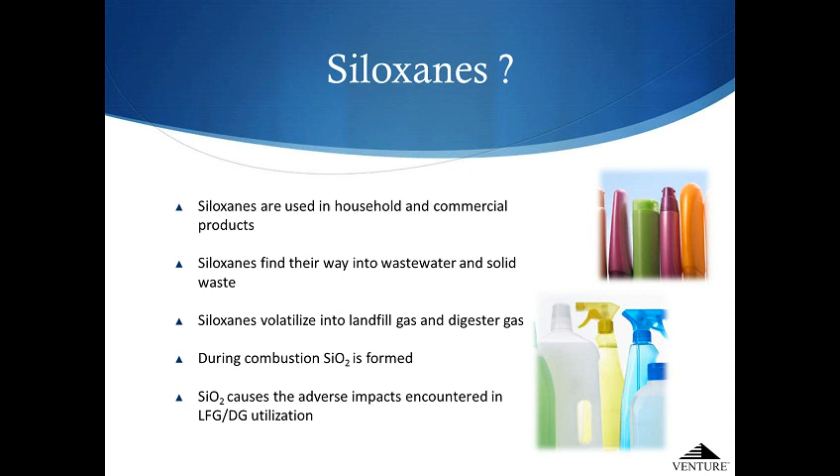We'll definitely get more into what happens inside your prime mover with siloxanes during combustion. The silica dioxide particles are, as many of you may know, very abrasive. As Kyle mentioned, you're taking the siloxane compound, which has a silica dioxide structure with an organic portion of the molecule. The organic portion burns in the combustion and goes away, but you're left with the silica dioxide backbone of the molecule, and those SiO2 particles are very abrasive, causing a lot of fouling of the surfaces as well as erosion on your moving parts in your engines and gas turbines.

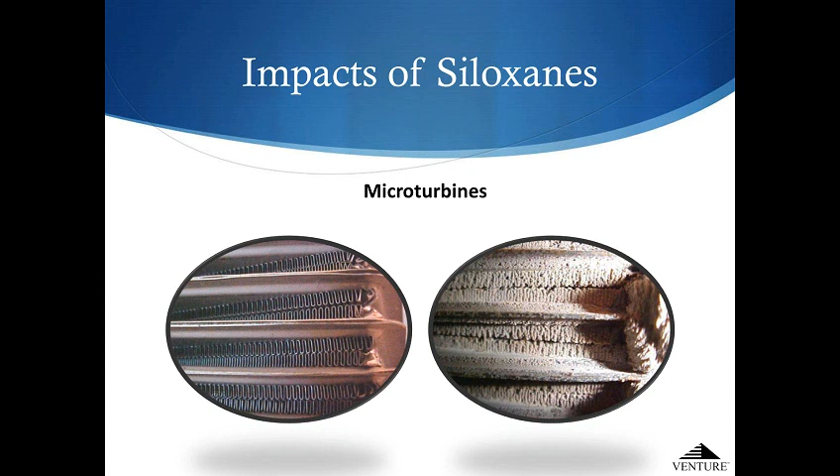And we have some really good pictures of that to show you. We'll show the impacts right here on microturbines. The fouling is obvious: clean microturbine on the left, fouled microturbine on the right.

In your boilers, I know that we've had more and more boiler projects recently. Reciprocating engines, which is, I'm sure, why most of you guys are on here. You can see the effects on the turbo on the left there, and then on the pistons on the right.

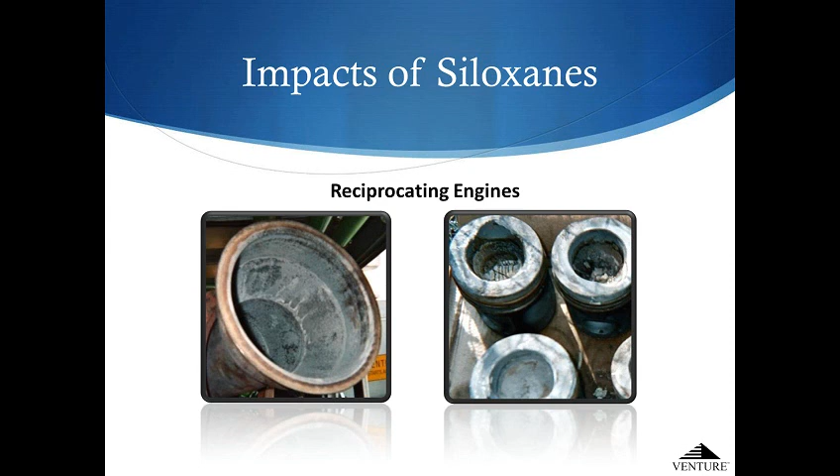Depends what state you're in, you're being asked or told to put post-combustion catalysts on your systems, and this is what can happen. Again, you're getting fouling in the media. You can see the honeycomb catalyst media photo on the left. All the grayish-white deposits are siloxane, silica dioxide residue, and it fouls the surface. From what we understand in our conversations with various vendors, there's no chemical attack of the catalyst, but it does coat the surface, and hence the catalyst cannot do its functional job because it's covered with silica dioxide particles.

So the objective is really to clean the gas so the post-combustion gas does not have any silica dioxide in it. Obviously, the catalyst vendors would love to see 0 parts per billion in the gas. That's not really practical, but there are limits. At least we know of one manufacturer where it has about 100 parts per billion target for silicon dioxide compounds in the gas, and that's really what we're striving to achieve or improve for siloxane removal.

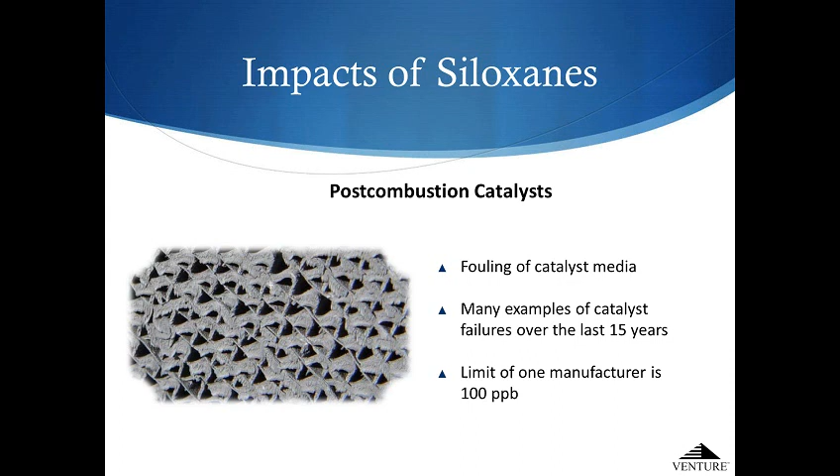So you can see the impacts that these siloxanes are having on your prime mover. You have a significant reduction in the efficiency of your engines or turbines. It makes your system unpredictable.

Certainly you're going to add to maintenance costs. You're going to change oils many more times per year. For top ends, many customers are out there manually cleaning the heads and pistons. Of course, you're increasing your likelihood of catastrophic failure as well.

So in addition to the deposits, the fouling, which creates corrosion, erosion of the rotary moving parts in your turbines and your reciprocating engines. The fouling from the deposits also has adverse effects on the heat transfer, so oftentimes engines and turbines will tend to run hotter when the deposits are inside the engines, which has damaging effects on the rotary equipment as well.

So there's a lot of reasons to really minimize the siloxanes, get those out of the gas.

Before we move on, there is a question that pertains to exactly where we're at right now. The question is from Patty: how can you identify the siloxane deposits from other corrosive matter on the equipment? How do you differentiate these materials?

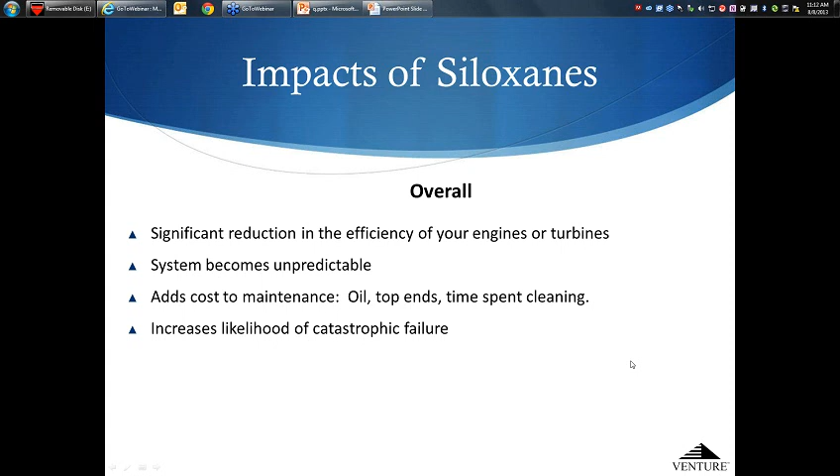Sulfur, switch gears here for a moment to sulfur removal, which is another problematic compound in your biogas. The sulfur is typically in the form of hydrogen sulfide, H2S, but there also are some mercaptan and disulfide compounds in your gas that oftentimes you want to remove.

The sulfur, in particular hydrogen sulfide, comes from gypsum, construction and demolition wastes that are found in the waste landfill gas, and then as it deposits or decomposes, you form hydrogen sulfide gas.

Now, the effects of the hydrogen sulfide are to corrode metal piping and equipment. Sulfur-bearing compounds, both the hydrogen sulfide as well as mercaptans and disulfides, all have distinctive odors they release. I'm sure many of you are familiar with the rotten egg smell from hydrogen sulfide.

Also, we're seeing a lot of regulatory limits being set on the amount of SO2 that can be released from facilities, and certainly when you combust gas that has hydrogen sulfide in it, the H2S gets converted to sulfur dioxide and sulfur trioxide when they're combusted.

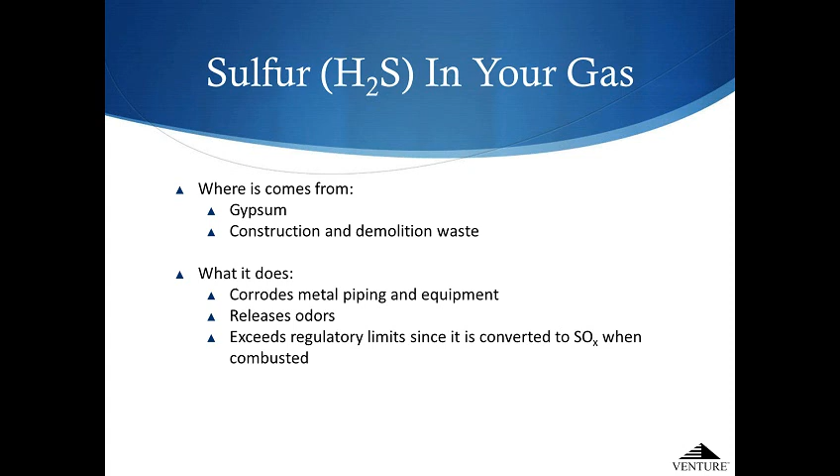And due to these regulatory limits, there's oftentimes a need to remove the H2S to meet these environmental regulatory limits for SO2.

So, several treating options are available. We'll just touch on four different broad categories. Venture has been involved with designing systems, supporting systems, and troubleshooting process problems on all four of these categories.

Upper left, you'll see it. Maybe some of you are very familiar with what we would call the solid adsorber, or scavenger systems. They're commercially available solid media where the gas flows through a fixed bed of this media, and then it chemically absorbs the H2S gas and holds it onto the media.

The commercially available ones include your Sulfatreat, FerroSorp, SulferRite. There's a number of carbon-based medias that are out there by various vendors that all will capture the H2S out of the gas.

These solid adsorbers are non-regenerable, and hence they're scavenger media, because once the media gets saturated or loaded up with the H2S, then it's a throwaway. The positive note for using a solid adsorber is there's no SO2 emissions.

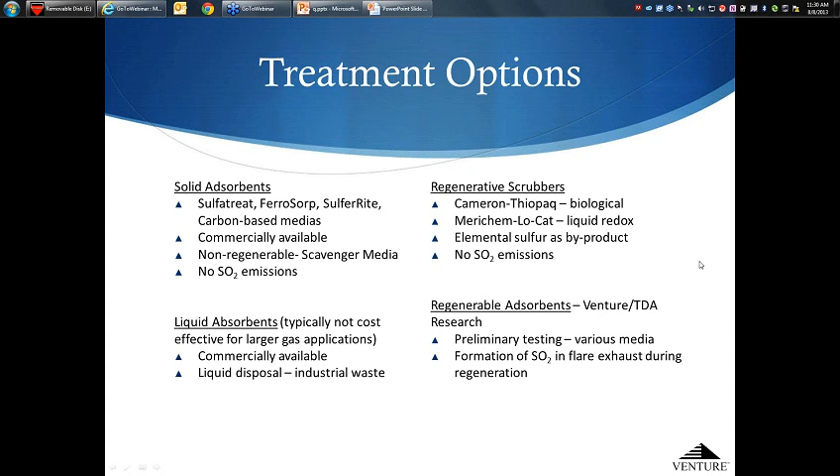Continuing on, we'll touch upon the siloxane adsorption system, a gas conditioning system to remove siloxane. It's predominantly targeted for siloxanes, but it does target other non-methane organic compounds, VOC organics, hydrogen sulfide to a lesser degree, and water moisture.

Our Venture system is a selective regeneratable adsorber system. Typically, depending on gas flows and concentrations, it will be either a 2 or 3 media mix system. Oftentimes we're using activated alumina, silica gels, and molecular sieve type medias -- a blend based on the concentrations and types of compounds we're looking to remove. Because it's a regenerative system, there's no carbon used, because carbon poses challenges to regenerate.

And this is a good time to answer the question posed by Justin. He asks, is saturated carbon considered hazardous waste, and can it be disposed of in a landfill? To begin answering, as you just learned, the Venture system does not use activated carbon.

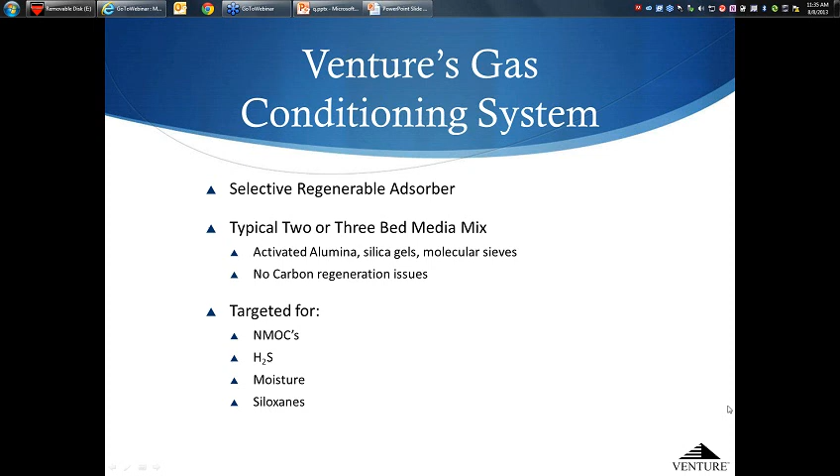I have seen several H2S scavenger type medias where they've failed for arsenic. But interestingly, on several landfills where they might fail one time, they'll test it the very next time they need to change the media, and the second time it will pass the test. So it really is, if you fail for arsenic or one of the other heavy metals, it doesn't mean that you're going to continually fail that test method every time.

Back up a second. There we go. So just to give you an overview of the process, the siloxane adsorption process that Venture has -- we're showing in this schematic two separate adsorber beds. We'll call them adsorber A and adsorber B.

You see the process gas will flow. There's a series of automated valves on the system. We're not showing the valves in this simplified schematic, but there are some pictures coming up in the next couple slides. The process gas would be treated through one vessel. For example, adsorber A is in production, flowing process gas through adsorber A, then through some post filters for particulate, and then the gas would flow to your gas turbine, boiler, or IC engine as treated gas.

While the process gas is flowing through adsorber A, adsorber B would be in a regeneration mode. We're showing that from the bottom up, where the regeneration gas would first go through a blower that pushes the gas into a heater, because we use heated air to regenerate. That hot air flows up through adsorber B. As it flows up through the vessel, it causes the siloxane compounds, organic compounds, water, hydrogen sulfide, all the contaminants adsorbed on the media, to release or desorb off the media, and that's swept over to a flare for pollution control, so the regeneration gas is thermally destructed in a flare or thermal oxidizer unit.

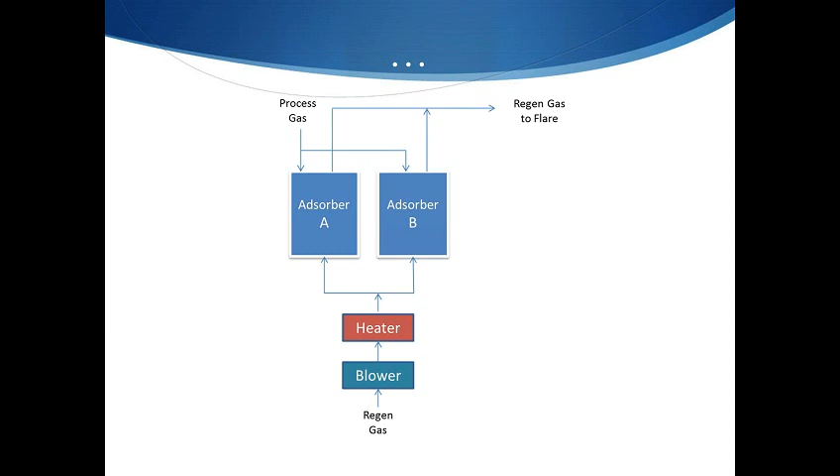As I alluded to, there are two ways that switching for regeneration takes place. Typically, in our original design, it was time-based regeneration. The production cycle on one adsorber is typically 24 hours, one day, and then we switch once a day from A to B, and 24 hours later we go from B back to A, and that cycle repeats over and over.

Now we're also looking at process control-based regeneration, where we're working with some vendors for online analysis of siloxanes using FTIR, Fourier transform infrared spectrometers, to analyze the treated gas and switch the beds when we see the concentration in the treated gas starting to increase. Then we would make the switch, as opposed to just strictly on a time base.

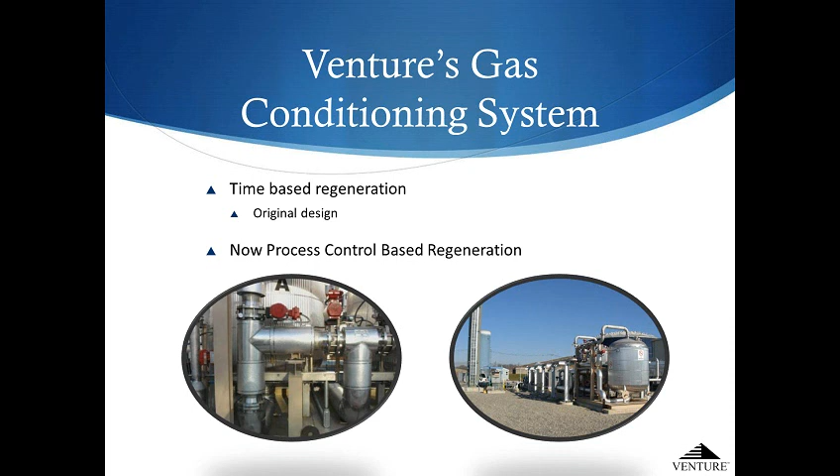Again, some of the benefits and procedures of our system: we see extremely low dew points, oftentimes minus 40 or better, because the media dehydrates, adsorbing water as well as siloxanes. We get 90% removal of non-methane organic compounds, and for halide, halogenated, chlorine and fluorine-based organics, up to 70-75% removal. Up to 95% removal of H2S. That's cycle time dependent, because the media has different holding capacities for these different compounds. So on a 24-hour cycle, you'll still have siloxane removal where your effluent is less than 100 parts per billion, but your hydrogen sulfide breakthrough will occur before the 24-hour period.

So we're going to hop back and answer Graham's question about the scalability of these systems for smaller applications. I can say they're scalable to any size; for the regenerable system we're currently discussing, we have applications as small as 400 SCFM. There's a good chance your question involved a system smaller than that. Recently we've had multiple inquiries for applications of 30 to 150 SCFM. Economically, that doesn't make sense currently for the regenerable system.

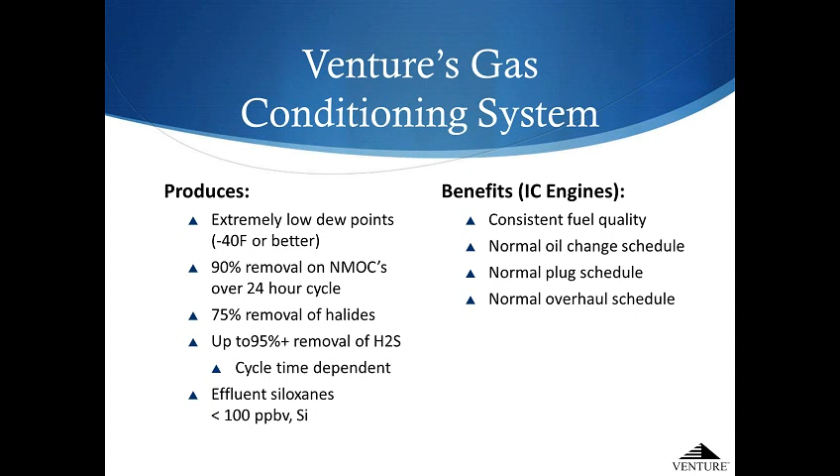Subsequent to that, there will be a slight increase in CO2, but in our process of repressurizing the media, when switching from regeneration back to production, we'll repress the bed with your biogas, and that gas is then vented over to the flare. So the CO2 gets adsorbed on, and the bed is preconditioned prior to switching. So when you switch back to production, there's very minimal to really no detectable CO2 bump.

So here's a photograph of a 3-vessel adsorber. We're showing on the right-hand side there. You can see the one adsorber has a big A on it. That's the vessels.

This is a system where one vessel or two vessels would be in production with the other vessel in regeneration. Also on this skid, in the foreground is the control panel that has your PLC that's doing all the control of sequencing the valves, as well as the blower and the heater we talked about for regeneration that heats the air. That's all on the skid, and that is all controlled. The set points and the switching of turning them on and off is done via the PLC on the skid.

So truly it's a system that is put on the skid. You set it on a foundation at your site. You bring your process gas up to the inlet flange and the discharge flange, hook up your power feeds to the system, and you're ready to rock and roll with treating gas.

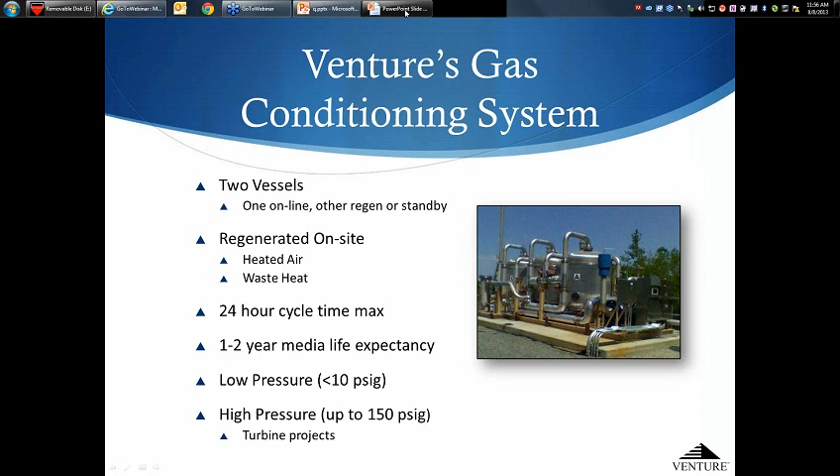We also have our largest systems with 2 treatment trains, but we keep them on skids and keep them at shipping height, as opposed to large adsorbers that would have to be shipped separately and mounted onto foundations. The photograph on your screen now is one of our larger systems. This treats gas up to... we have 2 installations of this size, actually a third going to be commissioned in a few months.

The 2 installations now are treating 12,000 to 13,000 SCFM of gas. What you see on this drawing are the 6 vessels where the red valves are, right in the middle of your screen. Those are 2 trains of 3 adsorbers each, treating the siloxanes.

Since these have SCR catalysts, and we want to ensure the SCR and CO catalysts are protected, we maintain less than 100 parts per billion siloxane concentration in the effluent gas. The 2 vessels in the foreground are a polisher, so we use a second stage, a non-regenerative polisher vessel. In the upper right corner of the diagram, you see those two blue vessels.

Those are the regeneration blowers that blow the air for regeneration. And of course all the red valves in the middle are just the actuators. Those are the series of valves that do all the switching, switching the beds from regeneration to production. Again, all that control is done automatically with a PLC mounted on the skid.

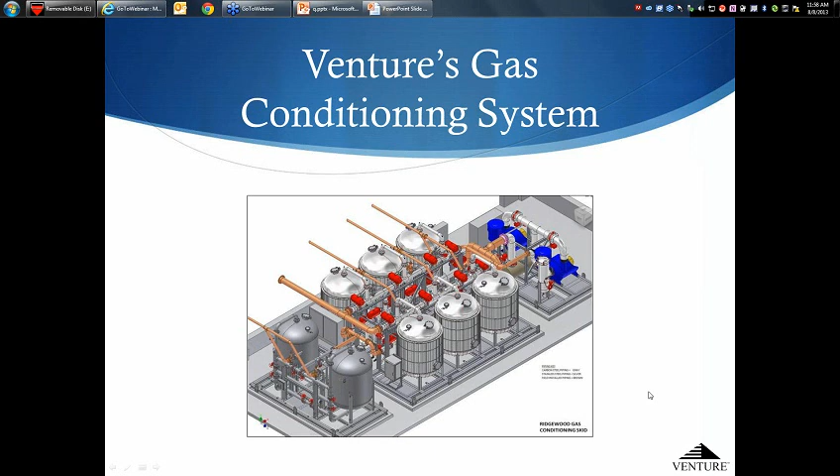Now this system, because of its size, instead of one skid, actually shipped as 4 separate skids. But again, all the electrical instrumentation and valving was pre-wired and pre-installed, so it made for a fairly quick and easy installation once it was brought on site.

Here's a partial list, pretty complete but nevertheless partial, of Venture's gas conditioning systems out there in the world. Just in the last month and a half, we've shipped 4 systems.

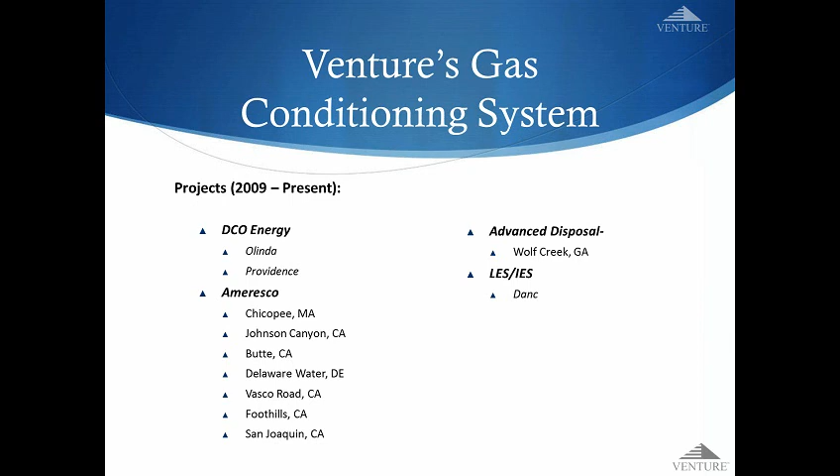And I really wanted to get to this. I know it's 11:58, and I promised you guys would be out by 12. We will stick around a little bit longer, but I just want to make sure we get 99% of this done before noon. So if you have other plans, you can hop off.

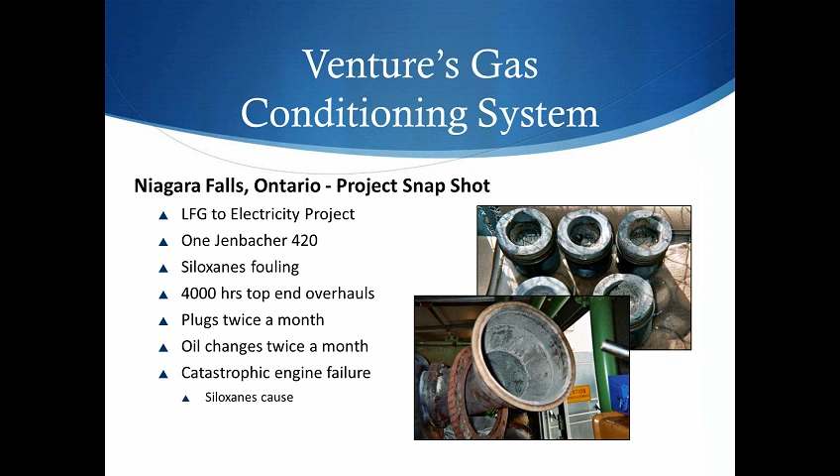So that was what triggered this client to want to put a system in at their site. It was a smaller system, one of our first systems we put in. It's since been running; we have 15,000 hours in operation there, but this slide hasn't been updated. It's really been 4 years, so they're in excess of 32,000 hours of operating time with this system.

The slide was updated, it just wasn't saved as updated. The inlet gas composition there, you want to switch back to the slide? The middle there, you see the raw gas, some questions we had earlier too on the concentrations.

This gas was 55 milligrams per meter cubed as siloxane compounds, and the target was to get less than 5 milligrams per meter cubed siloxanes. That was what the engine manufacturer requested, and they also are getting greater than right around 75% NMOC removal, and since then they've seen these targets exceeded on a fairly continual basis.

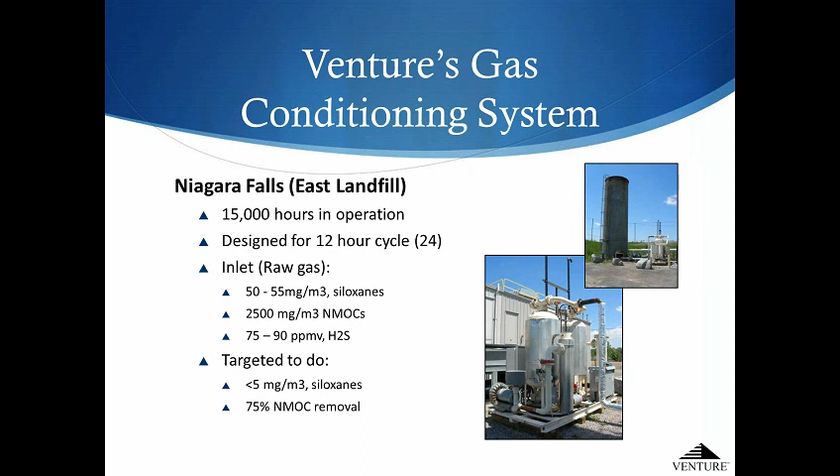Next slide, some of the actual performance. We've seen that indeed they've actually been less than 100 parts per billion, which translates into less than 0.1 milligram per meter cubed siloxane.

They're still running below 120 parts per billion. The VOCs and the sulfur have experienced very high removal efficiencies. They're back to normal plug schedules. Their oil testing has shown that the oil is very clean. They haven't had any overhauls. They bore scoped the engine, it's clean. They don't have any plans in the foreseeable future to do any engine overhauls, at least attributed to siloxanes.

For this customer, they were hoping to get a payback of about a year to a year and a half, and based off of this, because the engine performance was so dramatically improved, the payback was much less than a 1 year payback on the capital investment.

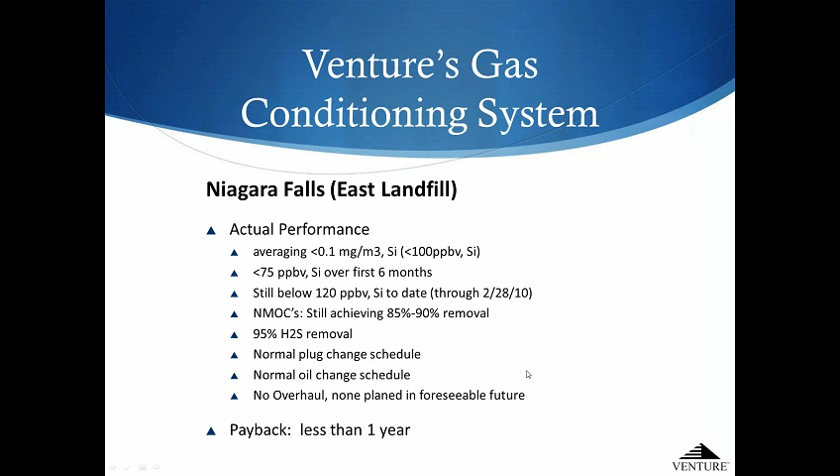Let me answer the question from Patty before we finish, this is actually the end. So how much did the application cost that you have on the screen? I think she's probably referring to the 6-vessel system. That 6-vessel system included the carbon polisher as well.

You won't generally need a carbon polisher. We'll generally recommend a carbon polisher only in situations where you're going to have a turbine, or you're going to have the catalyst SCR on the back end. So this was a high-pressure turbine project that happened to have catalysts on the back.

So with the carbon polisher and a 6-vessel system, that's right around a $2 million system. Our systems range from $400,000 to $2 million, and that would be for 400 SCFM and above.

Now again, if it's just passive vessels and media for something less than right now 150, we kind of have a gap in the 150 to 400 range there, I would say. So less than 400 SCFM, a passive system typically makes the most economic sense.

And again, that's just 2 vessels with media, and that would be about 18,000 pounds of media at less than $2 a pound. So 2 vessels plus the media.